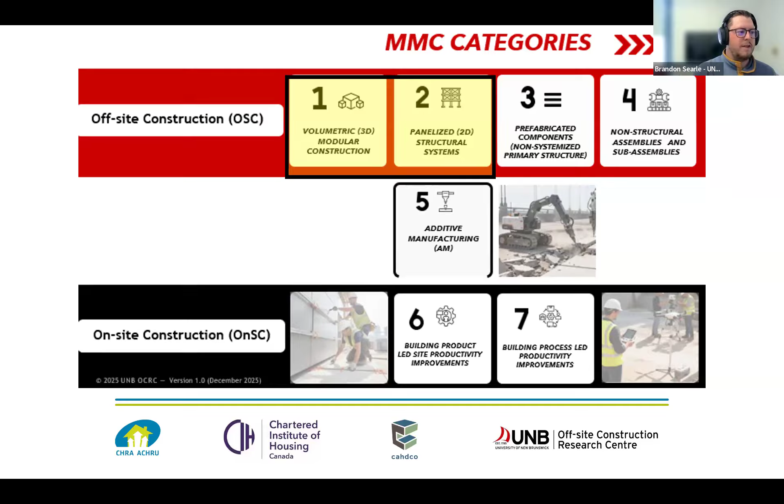Now, the topics that I'll touch on, which Paige mentioned, are the cost structures and financing, contracts, CCDC considerations and monitoring, and site protocols, drivers for replicability and offtake agreements, and then supply chain realities.

So one thing, just thinking about cost structures and financing, I will say right off the hop, it is pretty project dependent, and Lori and our speakers later will be able to speak to this a bit better than me, but it should be negotiated early on, and part of it can be dependent on your capital stack. So again, that's where's the financing coming from? It has been shown to be a huge barrier to offsite construction.

And so I have a few examples that I'll speak to, but this one example in particular, I'll be careful in what I say just because I don't know if I'm supposed to share too much about it, but there was a project in Canada, a multi-unit family, where the developer had worked with the same bank, same cost consultant for 20 plus years, and they required 20% down for the MMC components. They worked through their numbers, did their pro forma, did everything, and in the end, their bank that they had a really good relationship with still wasn't willing to give them the money.

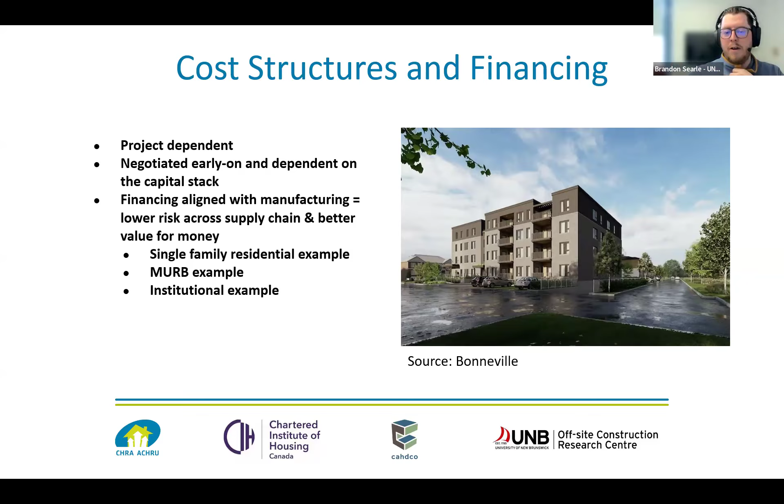We get into another area in multi-unit. Again, this isn't specific to this project, but this picture came from Bonneville, which we heard from on the 10th, where I've seen something like 20% down due at time of signing in multi-unit, and oftentimes public sector or nonprofit housing providers aren't comfortable taking that on. So we've actually seen scenarios where the GC takes on that risk and does the 20% down, and that can be a significant amount of money. And then there's progress claims, payment certifying and so on throughout the project, so that there's money flowing to the manufacturer throughout, and we've seen that work.

So in this scenario, the company was bidding on this public sector project. They knew if they put on a down payment, then they just simply wouldn't get the work. So they didn't put a down payment in, but then their scope was dependent on civil work being ready. What ended up happening is the site was not ready until 10 months after it was scheduled. So the modular manufacturer had to sit on their completed modules in their own yard for a full 10 months.

And luckily, they have been around for a long time and were able to take on that risk. But as you can imagine, they probably priced that project much higher than what the true cost would have been because of the way it was procured and because of how risk got pushed onto them. So it's just some examples where it's really important.

And we've talked about procurement and CCDC and transportation and logistics, but at the end of the day, right at the front end, how these projects get financed and how that influences all the other processes is so important. And so our center and others are working on how to correct this. So this is the same table that I think you saw on the 10th. And Lori and I have talked about this, so I'm sure she can answer questions on it as well. But just contracts, CCDC considerations, and monitoring and site visit protocols.

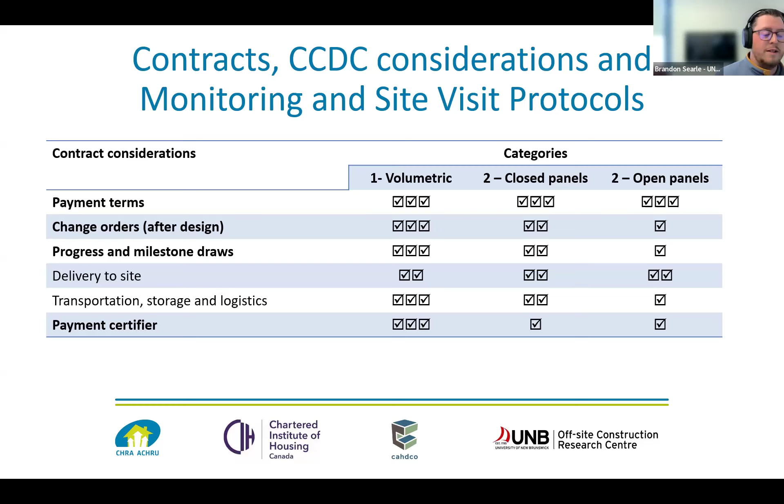Now, there are quite a few banks, and I believe all of the big five are looking into this and looking at products now that they can offer this industry to really scale up quickly. So hopefully we'll start seeing some more solutions from lenders for this. And I'm sure there's folks from CMHC on here. I don't want to speak for them, but I know that CMHC has explored this as well, or is exploring it.

Now, just going back to why we're talking about a lot of this, I decided to throw these slides in, even though they're a bit out of scope, but this is kind of defining the problem of why we're here and why we're thinking modern methods of construction, and why it's so important right now. So just going back to the price to income ratio index. From 45 years ago to 25 years ago, the price of a home was 3 to 4x income. In 2010, it became 4 to 5x. 2015 is the baseline in this graph. By 2024, so in 9 years, it went up by 37%, with Toronto and Vancouver being 10 to 14 times your income for the price of a house.

If you see the affordability crisis over the past 70-ish, 75 years, you can see how the price to income ratio has significantly worsened. And so I think this is why we're talking about MMC and delivering things differently, not to mention all the other labor shortages and so on. But this is a key part of the problem.

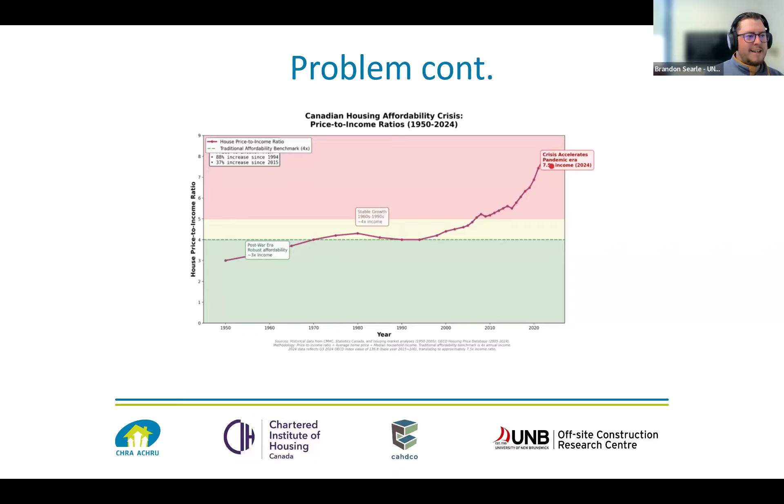And some of the lessons that we can take away from our neighbors. I was hesitant to include lessons from our neighbors because of the geopolitical climate, but both lessons are from blue states, so I thought maybe it was okay to include them. One was in California and one was in Washington State.

And so what it's really driving at is throwing additional money at it without thinking through how we do this as a system is not going to fix our problem. I just wanted to mention this problem before we get into the replicability topic. And one of the things that I often talk about when speaking in front of folks and doing keynote presentations is how do we drive innovation and productivity in the sector as a whole.

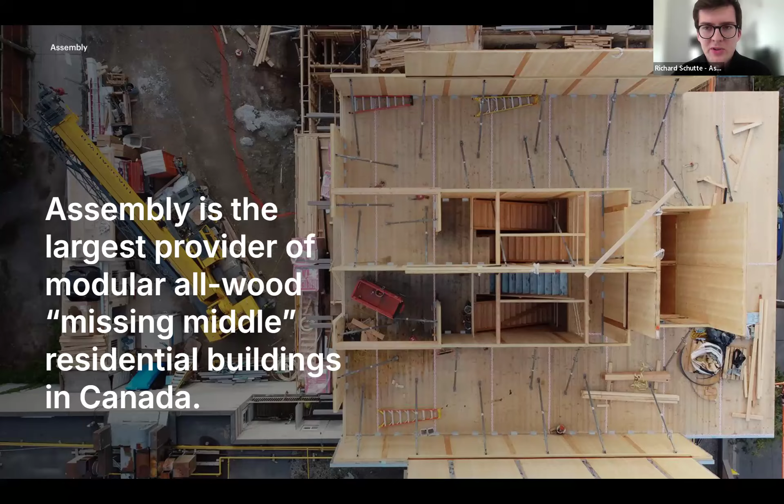I graduated with my master's in architecture from the University of Toronto, and I have a background in computational design, a lot of visual coding and programming, and originally my background was working in construction. Bringing all that together, it's been really a wonder working at Assembly for almost a year now. Really taking a different approach to missing middle housing, trying to use as much wood as we can in our projects, and consider deep repeatability and standardization without overfitting our designs.

So when you have too many engineering constraints, of course, me with my architecture background, on a plan, on a design, then you're losing some of the wonderful aspects that can come out of a local unique site, a genius loci. And so we have a number of building typologies that we use to approach different projects.

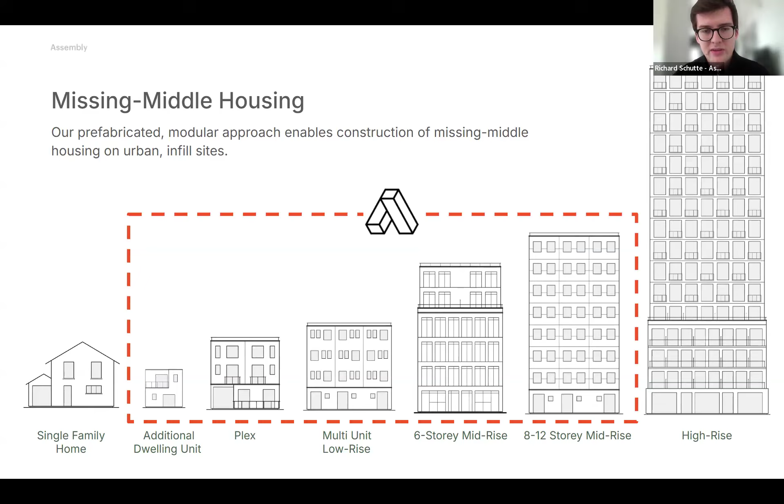And most of my work is twofold. First, it's our feasibility work where we take a site, we apply zoning constraints, zoning requirements, and we apply these different typologies, but more so as a starting point than as a restriction in design.

So we deliver a new model for affordable, sustainable, and healthy homes. A big part of working with biogenic materials, there's a salutogenic aspect to it of keeping people healthy, of reducing volatile organic compounds, and doing that in a way where we have a catalog of standardized factory built stick frame and mass timber housing products.

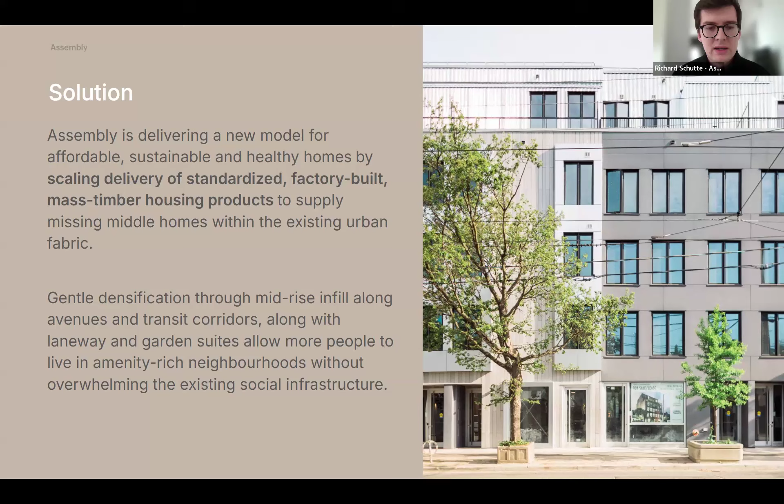So we are in the process of creating our factory in Toronto for lightwood frame wall and floor panels. And a lot of that will be around deploying configurable housing components from our product platform to sites in Toronto to really unleash their value, to create meaningful homes.

So in our product platform, we use mass timber and lightwood frame. We have standardized designs through a kit of parts. We're factory built and on-site assembled. So what is our kit? So we have a notably limited number of components that can be configurable, that are diverse enough to create small-scale suites up to mid-rise infill projects.

We're truly a design-first mentality. We're allowing for freedom of a typical design, but with the efficiencies of standardization. So typical architecture, which I'm very familiar with, is a design to order or engineer to order process, where you can imagine each building is a custom approach.

Now, the opposite side of that is a select to order process. Let me see if I have that slide. I do not. Where you'd just be selecting something from a catalog. And often this can create a placeless or overly engineered design that might be good for greenfield sites, but might not create the return, or might not pencil on a challenging urban infill site.

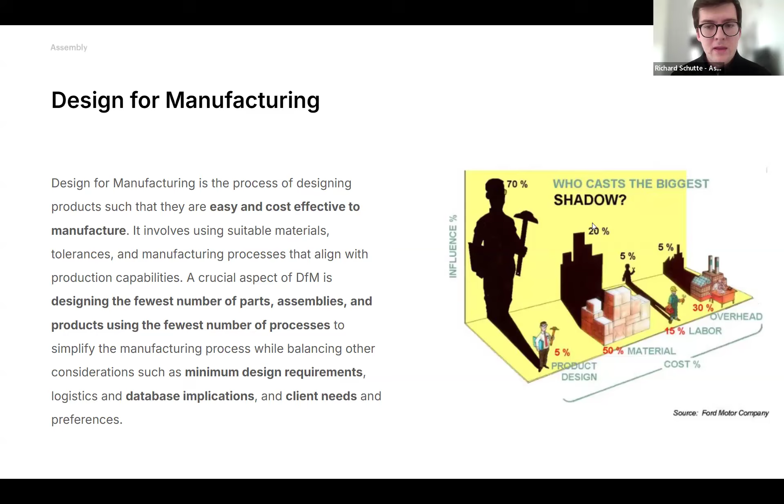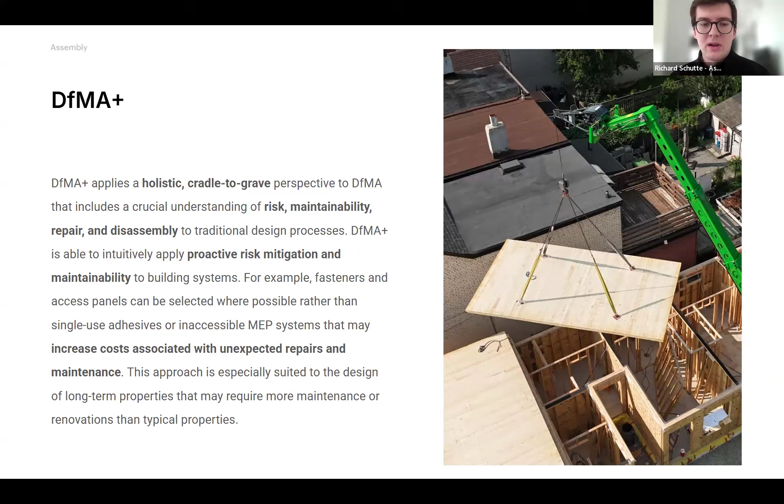Now, DFMA Plus is where we start to take a holistic cradle to grave approach, where we can start to think about repairs and maintenance on site with a digital twin. We can think about, again, disassembly and so forth, carbon costs. And similarly, we have a product improvement approach.

I won't get too far into this, but the idea is that you have this deep iterative ability throughout the components of your projects. Now, with this product development and treating buildings as products, which I know we're familiar with, how do we actually iterate and improve our buildings and architectural models? Well, that's by shortening that learning cycle.

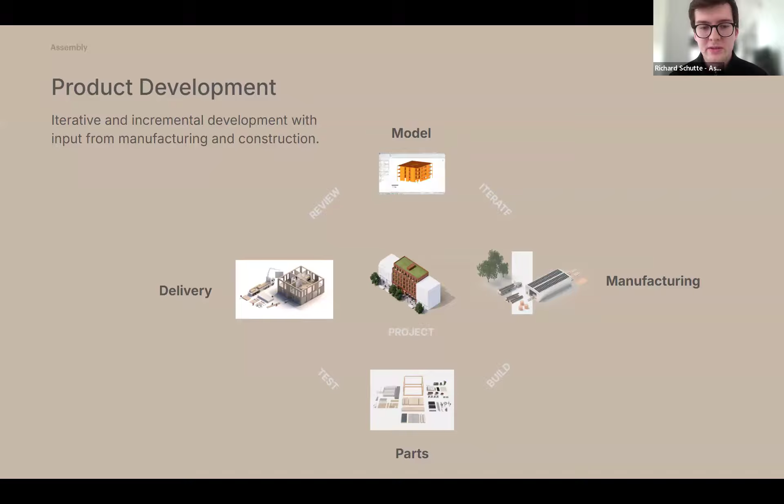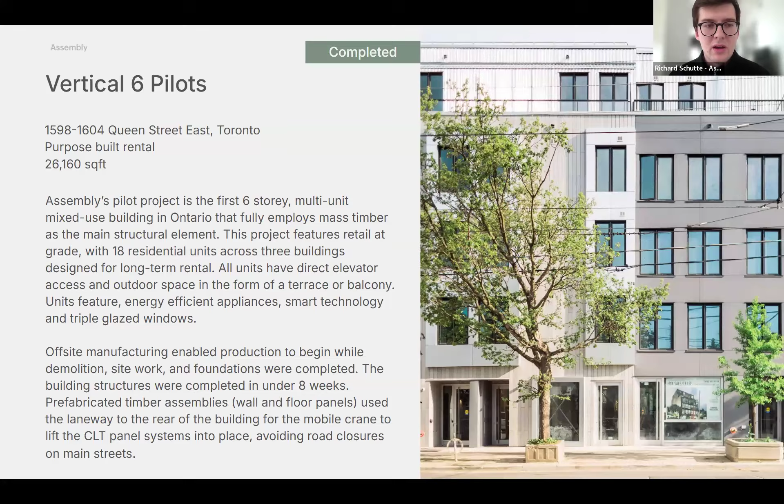And so taking more learnings from projects through project retrospectives and embedding that into the culture of learning in an office. And that's something that I love Assembly for. We're always learning. So I'll go through some of our projects. So we have Vertical 6 pilots. So it's a 6-story multi-unit mixed-use building, purpose-built rental, 1120 Ossington Avenue, more affordable housing for St.

Clair's multi-phased housing society. I know one of the topics today is around portfolio replicability and how difficult and challenging it can be to take all these different unique sites in Toronto, understand the zoning constraints, and push to build as of right housing. And so, as we look across these projects, there's a mix of CLT floors and cores, light wood frame load bearing walls, or all CLT, where we have to think about combining learnings from the building code, which I'm always learning about every day, with zoning constraints.

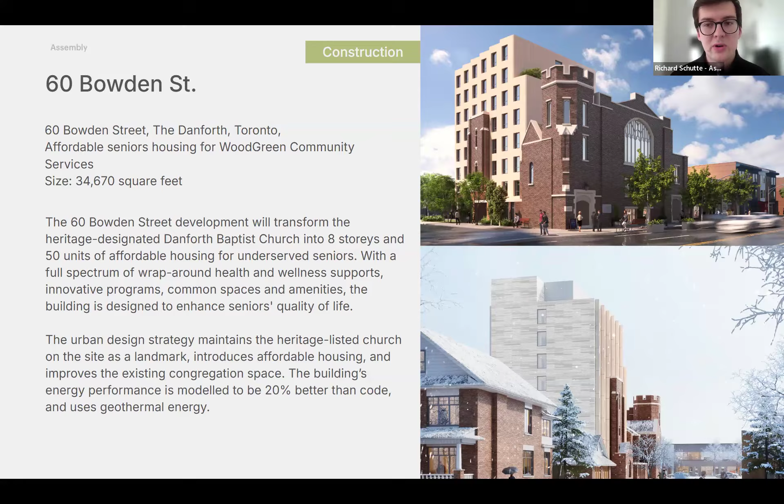We have Passage House, Town Line Estates, and you can see we have a variety of building typologies. And so one of the difficulties is finding standardizations across typologies. Thinking about how an exterior wall can be configured, where once you've resolved that wall assembly, now it's just about understanding the connection details, how we attach that to either a CLT slab or a light wood frame or I-joist slab.

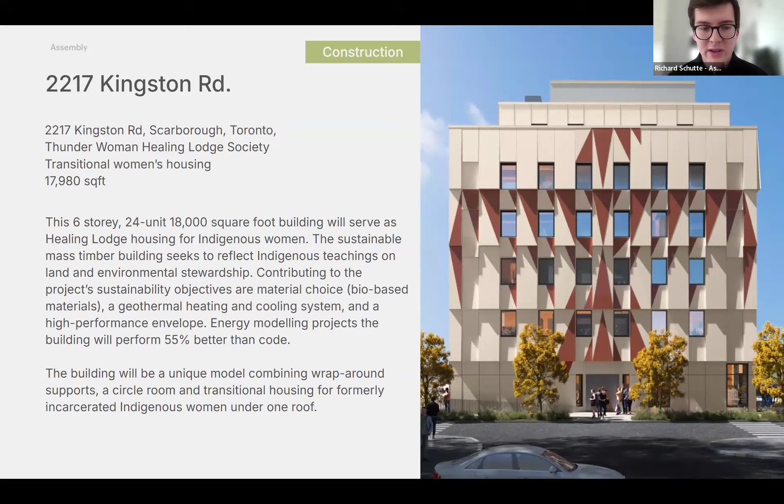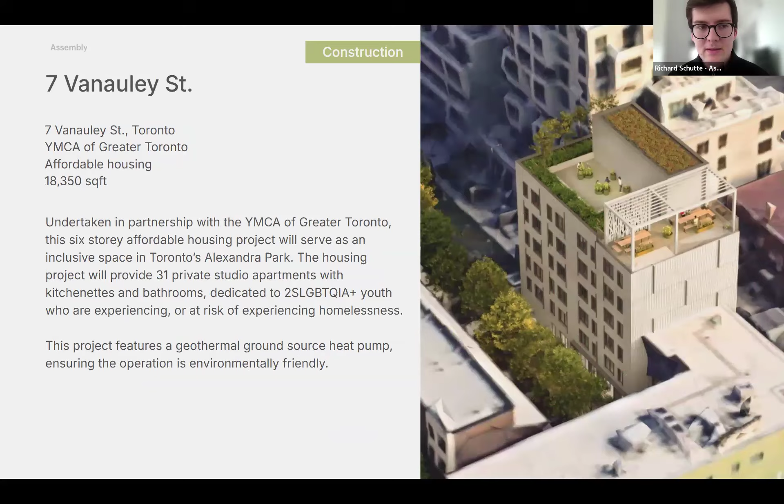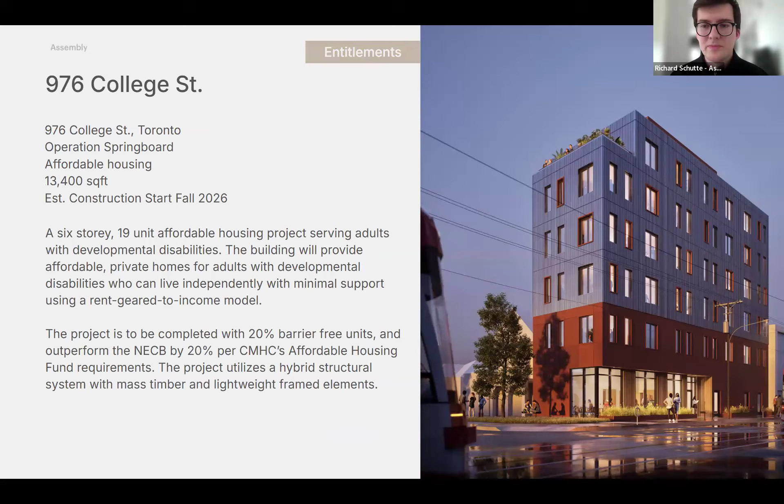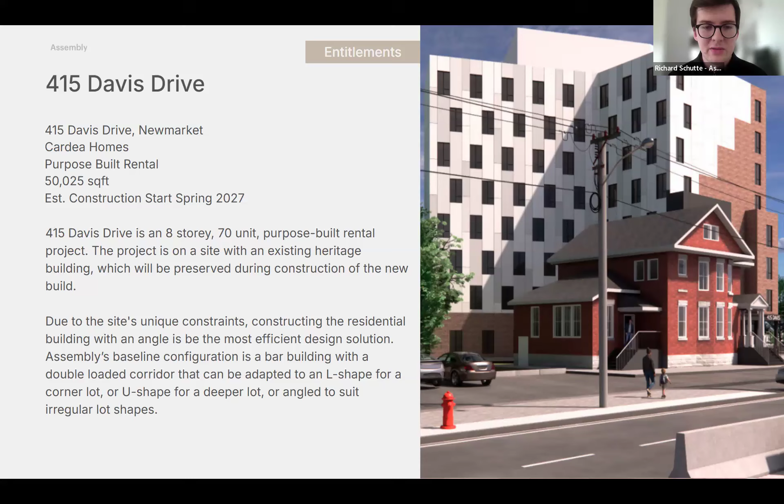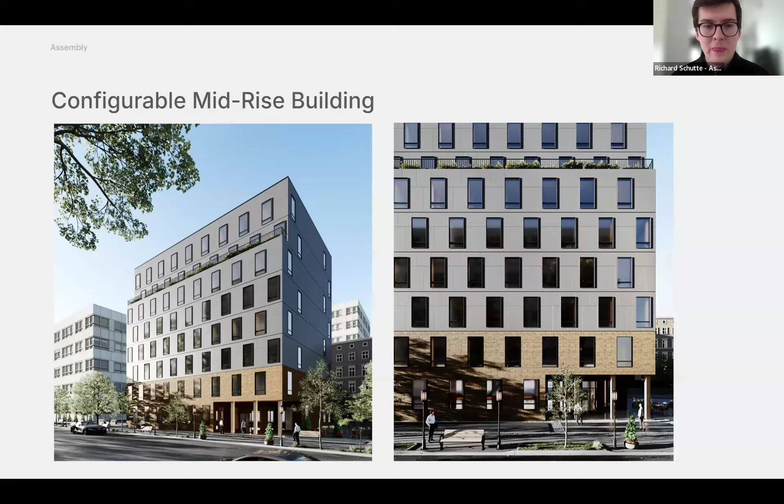So in creating a configurable mid-rise building, when we're not dealing with a volumetric system, there's more freedom, but there are also more rules you need to adhere to. And so here are 2 examples of L-shaped buildings that are similarly configurable, Davis Drive on the right, St. Lawrence on the left, or St. Stephen's. So we've designed a catalog of units which have resolved mechanical, electrical, plumbing, structural, with a mass timber structural system.

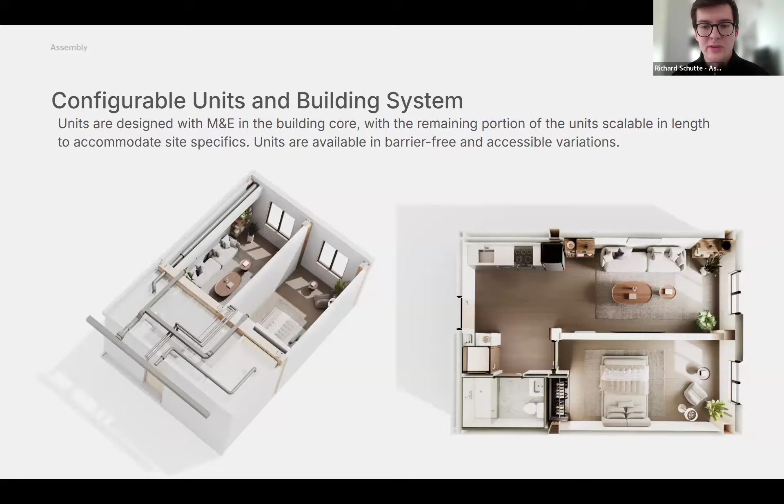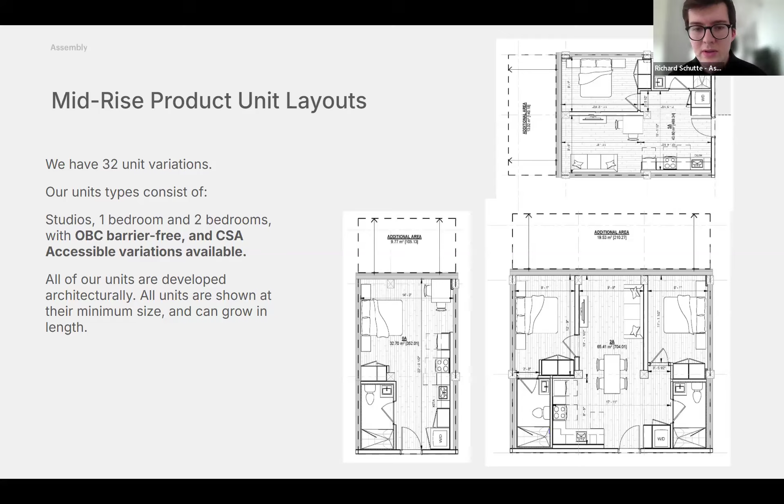And so because of that, there is this configuration, this extension that happens with the floor panels and the locations of our columns. So here, these are our unit layouts, all productized with product IDs, showing where the kitchens are, where the bathrooms are. And so the really exciting thing about these is that they've also been designed to fit around stair cores, elevator cores, garbage chutes, and mechanical shafts. And so in very traditional architecture you start top down: you have a site with the absolute maximum GFA you can get from that site.

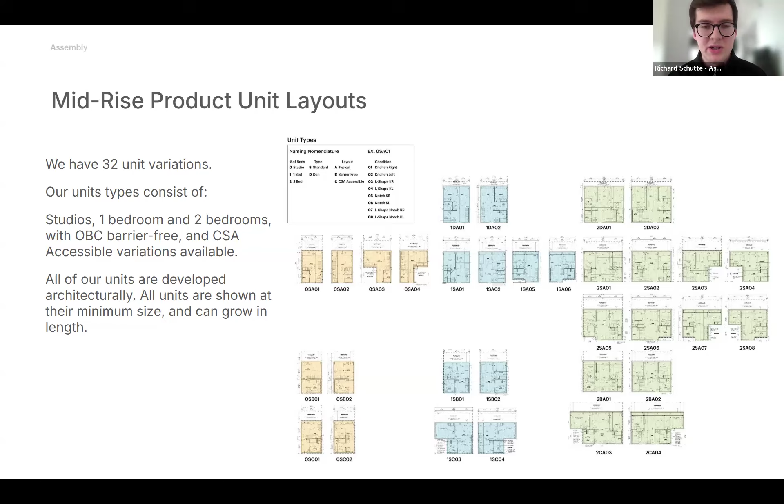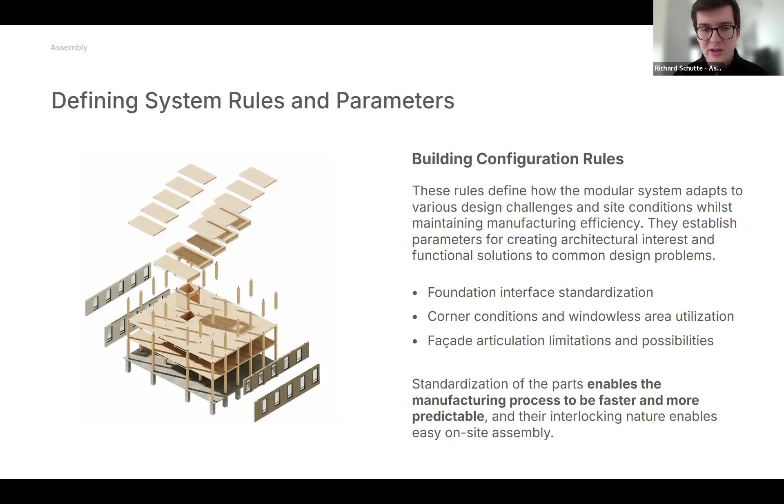But now we're starting bottom up like Lego pieces, which I know is not new in MMC, as well as some of our others. But now truly we have configuration rules, how pieces of a kit of parts can come together to create a meaningful building that is resolved structurally, mechanically, electrically, plumbing. And now, how can we get these portfolio efficiencies through this replicability? Well, then it's through various configurations of this building system. And so here's a GIF on the right showing how some of these components come together.

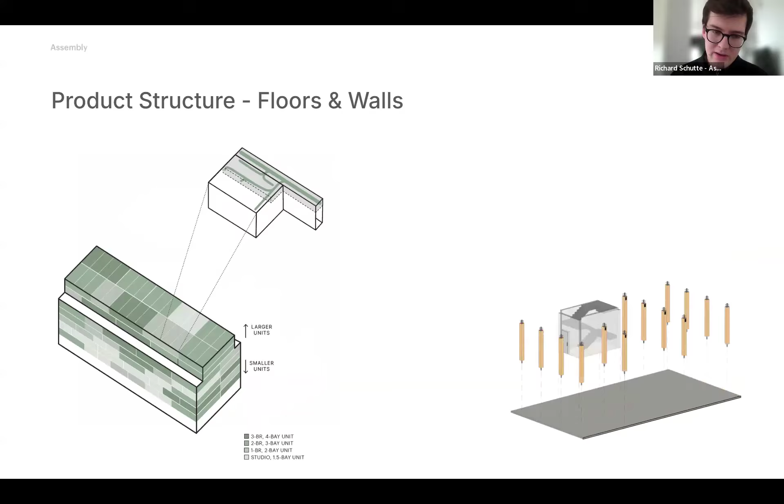And on the left, you can see a diagram of how some of our units are kind of placed in this building without the need for necessarily stacking. So again, in my work and doing these feasibility studies, which are now across typologies, but I'll just focus on this mid-rise typology for now.

In placing these different units, we can treat them as areas. Since they've been resolved internally, we can, with rules over how they can connect to the corridor, where we need stairs, elevators, mechanical shafts. Now, really quickly, a client can come to us and we can provide them for free with a test fit of their site, give them units, costs.

And so all of what you've seen here, my background in computational design, I've created a configurator to actually generate and place this geometry in Revit. Since Revit is our universal coordination software where we do our manual architecture work and where we'll do BIM coordination, clash detection. And so it's not just about these test fits.

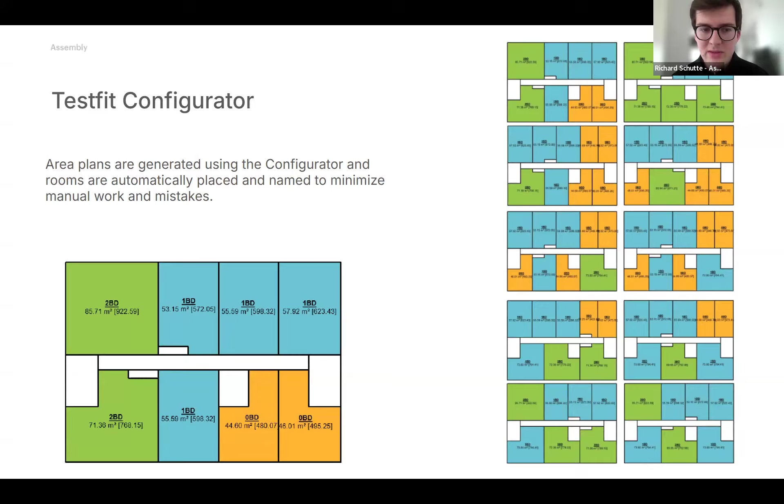We also have an early works process, which is after we've been engaged by a client, we'll produce a high level of detail Revit model with all the interfaces, all of the toilets and plumbing, everything embedded. And so, as manufacturers, this is kind of going beyond a design assist. We're designing the entire building, and we have a process working with architects of record and engineers of record. And so, this is how we embed design for manufacturing and assembly.

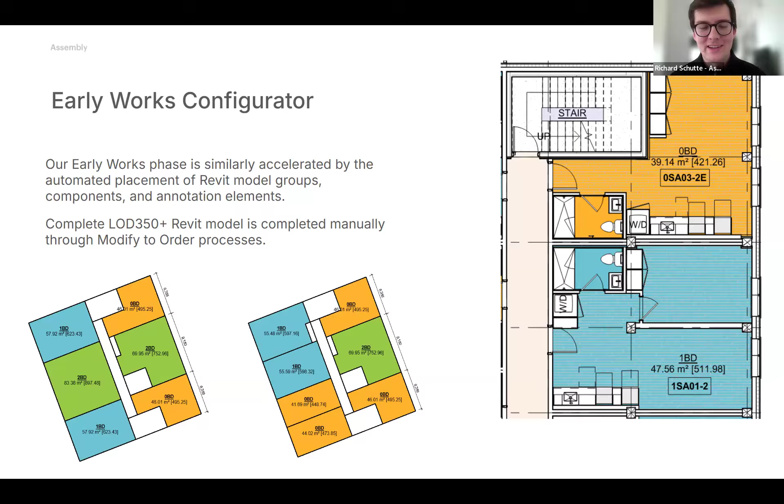And part of it is, in a sense, architects having a desire to be in control all the time, but really, managing that. And understanding our relationship with architects of record. Assembly Corp is not an architecture office, even though we do have architects, and understanding where that role is. How early can we bring in an AOR and EOR? And so now we are doing that as early as we can on these projects. So getting engineering sign off, getting architectural,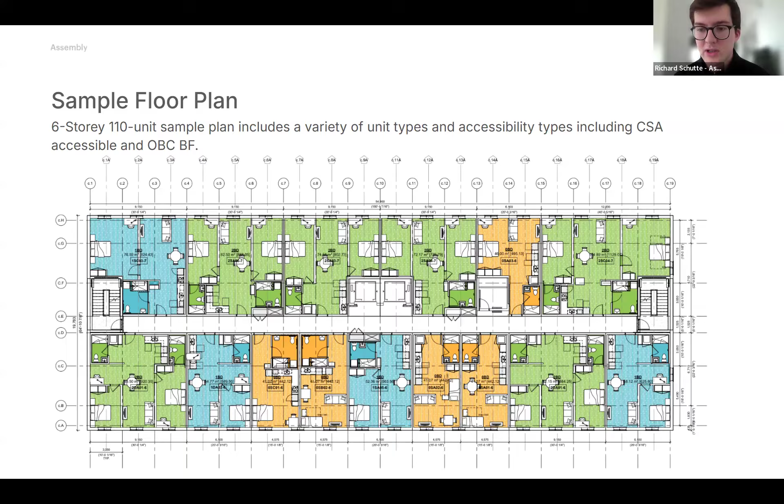we're trying to really push this industry to think about the roles and traditional roles differently. And so when we can have these building systems that have more pre-coordination, then we can get these projects quicker and quicker, which we found is important. So I'll just end with this GIF of a configurator. Again, this is just for a double-loaded building typology. I've also created another for multiplexes, another for suites, another for scissor stairs, which we have a number of projects going on.

And on the left, you see, I don't know if you'll be able to read it. It says desired 0 bed, 1 bed, and 2 bed. So here I'm just switching through these random desired unit mixes where clients will come to us with understanding of their client demographic, their pro forma, and we'll be able to provide a very, very close actual unit mix to what they need. Similarly, a very close accessibility mix. So we'll be able to meet at least their highest OBC barrier-free and CSA accessible unit counts.

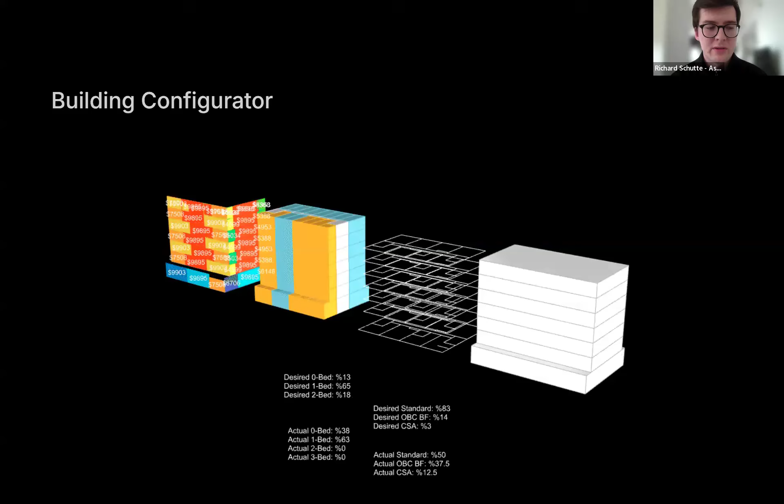And so we can do that very quick on their sites. With understanding of, you can see on the far left, we have costs for wall panels. And so we're getting a very quick costing. And so you can also get an understanding of the cost implications of growing your buildings. There's a big difference between wanting to create the most units on a site and wanting to create the most gross floor area on a site. And that has implications around structure, et cetera. So thank you.

Brilliant. Thank you so much for that presentation. We have a question in the comments here. So the question is, I'm hearing that volumetric modular barrier-free accessible unit variations tend to be substantially larger than non-barrier-free variations as compared to traditional on-site construction. Of course, this then impacts your building efficiency and ultimately your pro forma. Can you comment on how best to maximize the number and quality of barrier-free units while using modular?

Yeah. So barrier-free, it's not actually that big of a problem. It's really when you start getting into CSA accessible, where you have 1800 millimeter turning circles. That's when you start getting substantial bathroom sizes, and you start to switch between being able to get 2 bedrooms in a unit to only getting 1 bedroom in that unit.

Yeah, and you do have a path of travel to consider, but in a sense, you want to be providing units that are meaningful and that are quality, and they are large enough. And so, once you start getting like studio units that are like 350 square feet or less, they just start getting too small. And so often, I found having barrier-free units is not that prohibitive to architectural layouts.